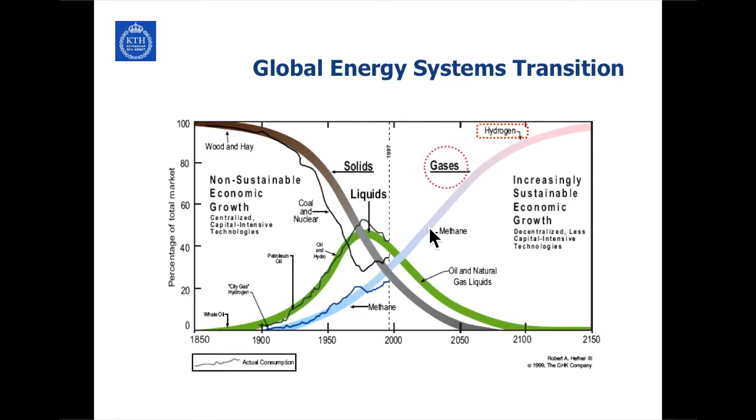So the thing we are trying to do is use natural gas right now for power generation to replace coal. So the usage of natural gas is going to go up. Eventually we are going to run out of natural gas, and it becomes about the use of methane, which also comes from natural gas. Eventually in this scenario we'll end up using hydrogen as the energy source.

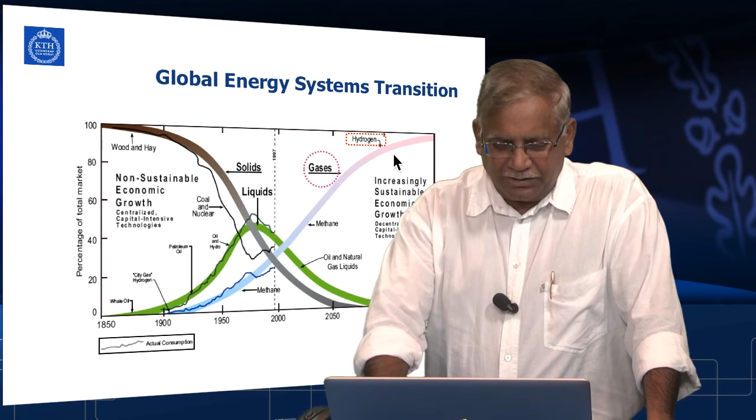So primarily this transition should take place around 2100-2150. This instance is primarily due to climate change and concern about sustainability and so on. So we can see the energy we are eventually getting into using hydrogen.

Now the question is, how do you produce hydrogen? Of course, we are interested in producing hydrogen using sustainable methods, and this is what's important - we want to have sustainable hydrogen. We produce a lot of hydrogen right now because hydrogen is used for cracking crude oil into gasoline and all that. So wherever there are refineries, we require a lot of hydrogen, and typically that hydrogen today is produced by cracking natural gas. So that is not what we like to do.

What we want to do is either use sustainable sources like biomass, or we use wind power, where the electricity is used to do electrolysis of water, or use solar power again to do electrolysis to produce hydrogen. There is one other way which is also non-polluting, but has other concerns - using nuclear power, which is quite cheap, but except we have other issues with nuclear power, like safety and what do we do with the spent fuel and all that stuff. So if you do that through nuclear power, we do it through catalysis.

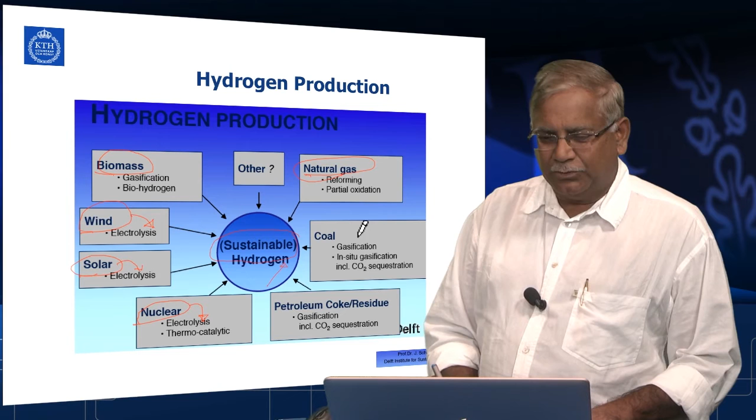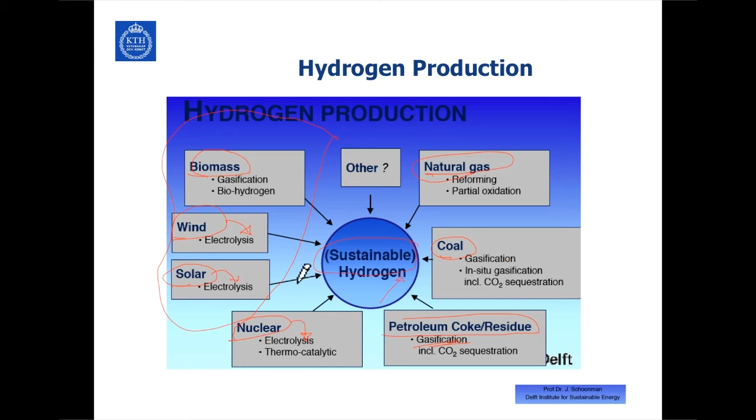Currently we are producing hydrogen by non-sustainable means using natural gas, which is how we produce most of the hydrogen today, and a little bit using coal, through gasification, or we use petroleum coke residues to gasify and produce hydrogen. But our intent is, in this context, when you produce hydrogen, we are producing using these three renewable sources: biomass, wind and solar.

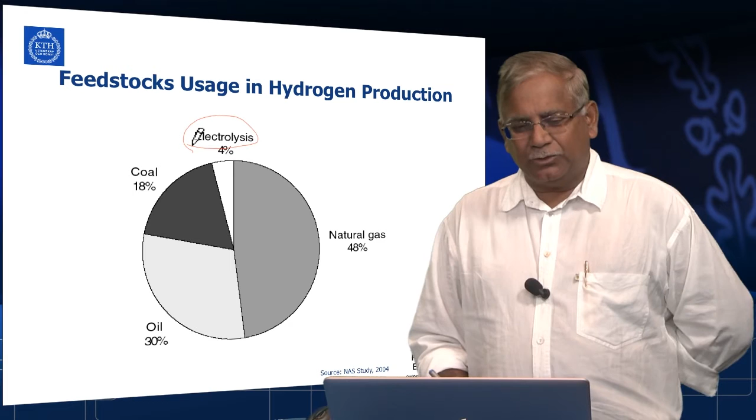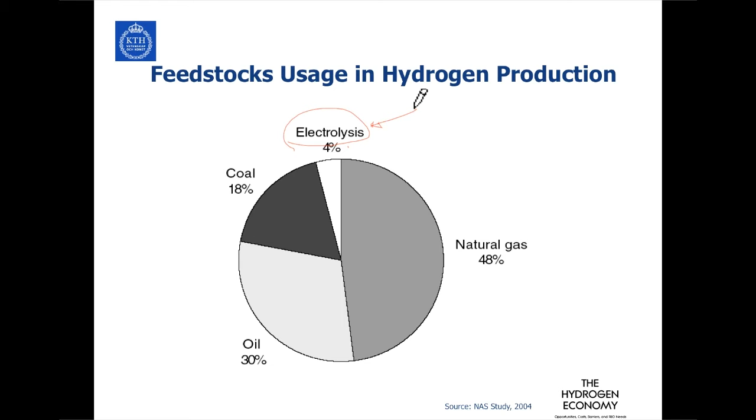Right now the feedstock usage in hydrogen production, as I said before, is mostly natural gas, and we also use oil to produce hydrogen, and somewhat coal. Electrolysis, which of course is the non-polluting way of producing hydrogen, is very little used because electrolysis costs quite a bit of money. That is the reason why we'll talk a little bit more about that. So most of the hydrogen now is being produced by using natural gas.

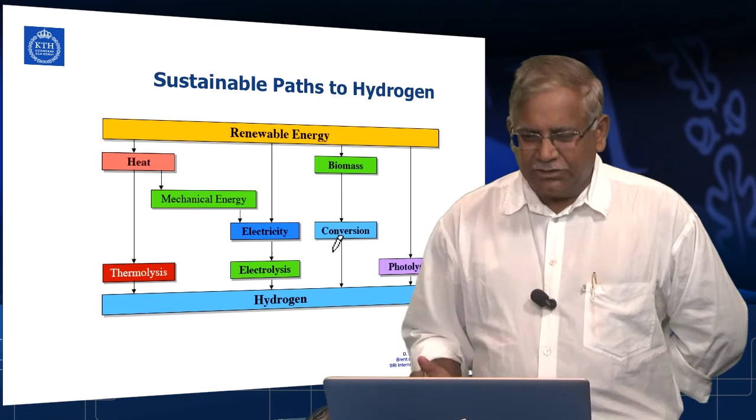And what is the sustainable way of producing hydrogen? You have renewable energy. One way is you produce heat, like for example concentrated solar power, or through gasification using biomass. From the heat you produce mechanical energy, and from mechanical energy produce electricity, and you use electrolysis to go into hydrogen. Or you can do what is called thermolysis, using very high temperature heat to break down water into hydrogen and oxygen.

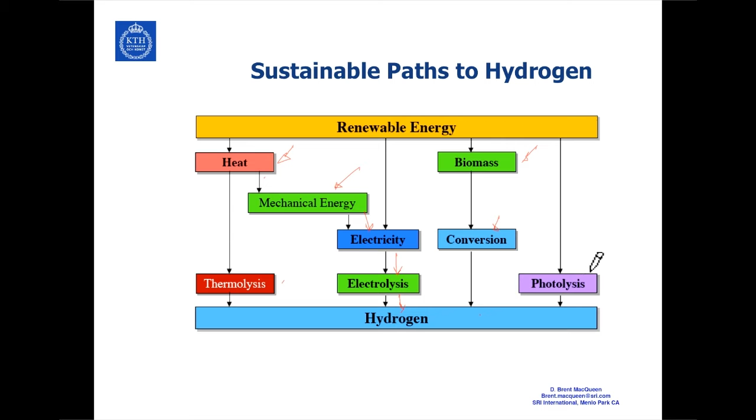Or, as I said, you can use biomass, and from that you produce CO and H2 by doing gasification, and from that you can do further reduction of the CO and produce hydrogen. Or you can do what is called photolysis, quite similar to a solar cell, but here you put the solar cell in water and do what is called photolysis. We'll briefly talk about that.

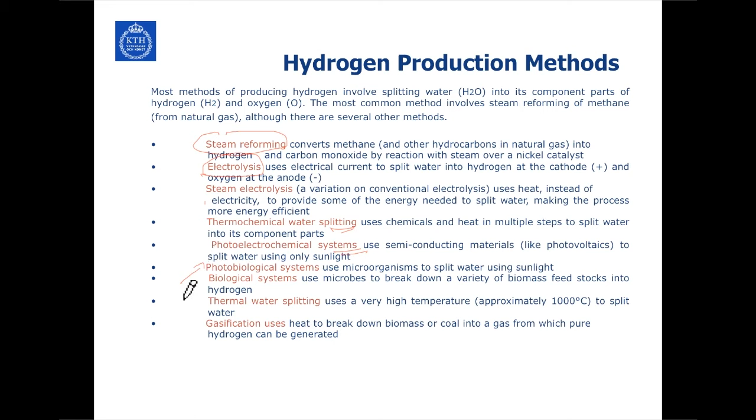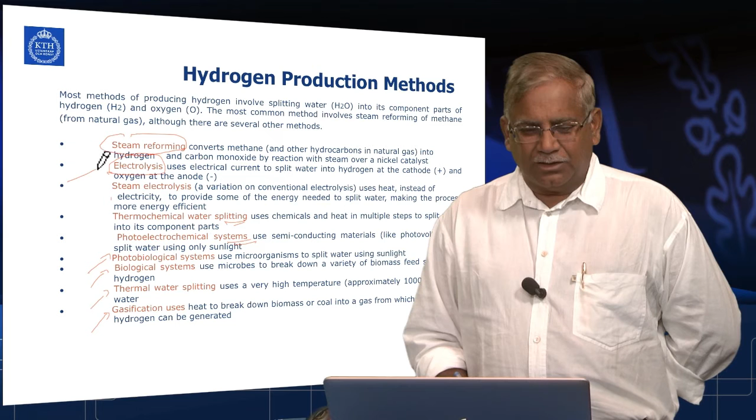So we talked about the different production methods. One is steam reforming, which converts the methane in natural gas, and electrolysis, which is splitting hydrogen and oxygen. You can do steam electrolysis as opposed to water electrolysis to minimize the energy used. Thermochemical water splitting is another one, and photoelectrochemical systems, photobiological systems, thermal water splitting, and gasification using heat. So these are the different production methods, and the most easiest one, which is very familiar, is electrolysis.

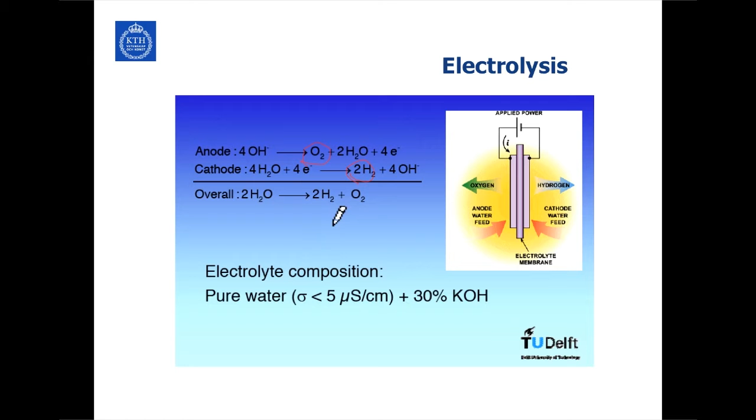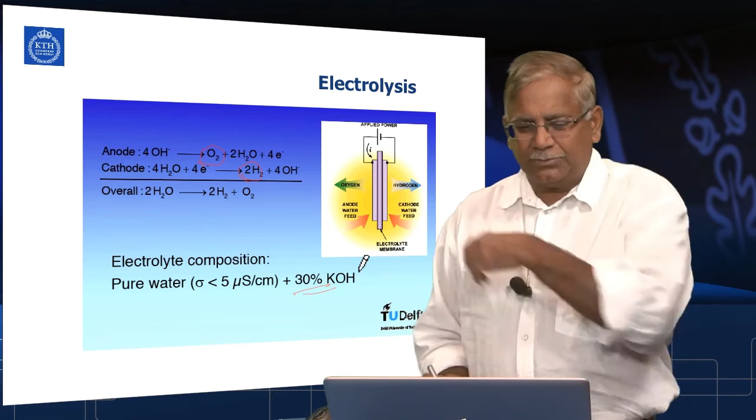In electrolysis, what you simply do is use water and split the hydrogen. In the electrolyzer, you put the water at the anode, then you apply voltage to the anode and the cathode. You split the oxygen and hydrogen from the water, and the hydrogen is the one we're interested in. Oxygen we can reuse for other purposes. Then you have to put some catalyst in the water, and we typically use potassium hydroxide, about a 30% solution.

The efficiency of electrolysis can be quite high depending on the theoretical efficiencies - you can reach about 85 to 90%. But for high purity hydrogen, you have to have high purity water. Typically when you want to do electrolysis, you take about 50 kilowatt hours of energy. So on average...

...kilowatt hour energy to produce 1 kilogram of hydrogen. Now 1 kilogram of hydrogen has about the same amount of energy as 1 gallon of gasoline, so you can think of it that way. If you take 50 kilowatt hours of electricity to produce hydrogen through electrolysis, electricity cost is typically about 15 cents per kilowatt hour in some places in the United States. So you're talking about $7.50 just for the electricity cost. But if electricity is very cheap, like from a nuclear power plant, about 3 to 4 cents, then electricity cost is only about $2, and you can produce hydrogen at an economical price.

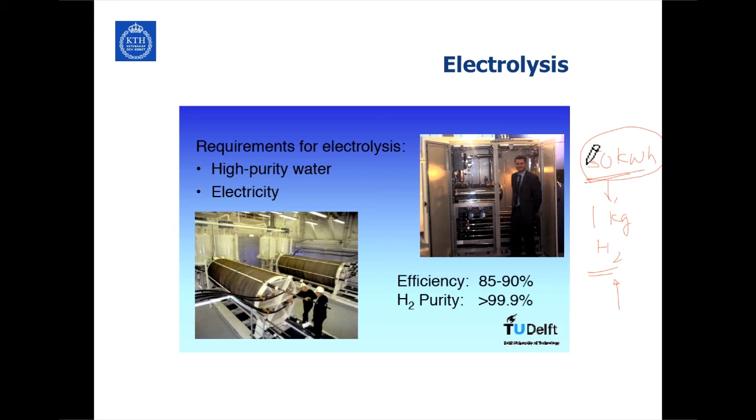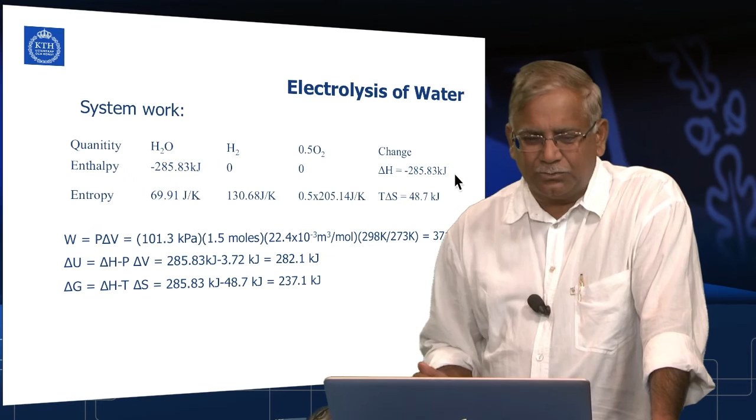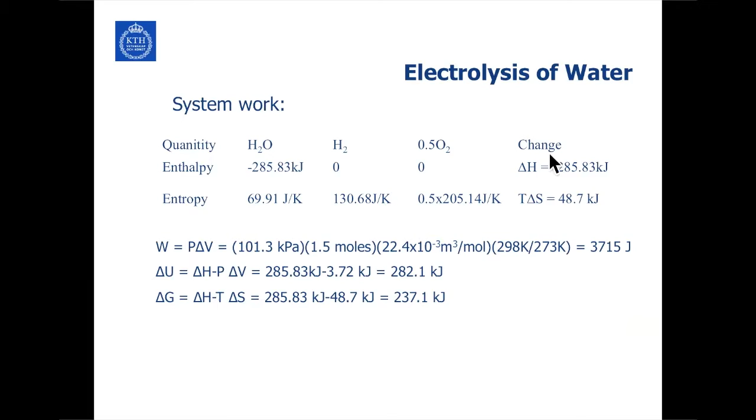So the question is, because electricity is the input and water isn't that expensive, most of the cost is in the electrolysis electricity cost. If you can find cheap electricity, this is the best way to do it. This is how the chemistry for electrolysis of water works, and how much energy is needed - you learned this in chemistry class before.

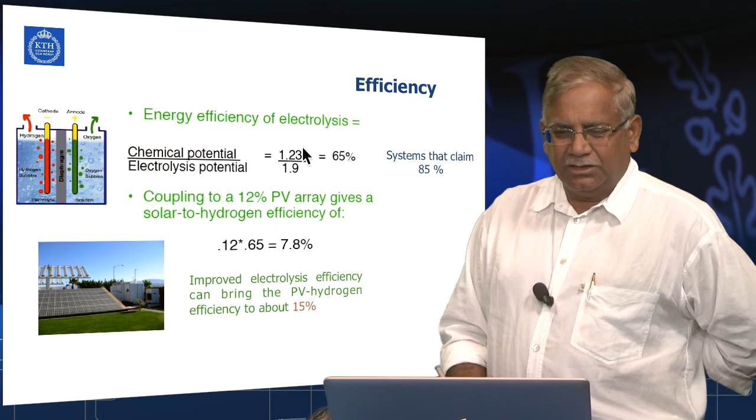Now we look at the efficiency of how it can be produced. The energy efficiency of electrolysis is about 65% for commercial units, but large scale systems have efficiencies close to 85%. The chemical potential is about 1.23 and electrolysis potential is about 1.9 - this is in terms of voltage. You can use less voltage in this case and get higher efficiency. So the idea is to reduce the electrolysis potential, done using different materials for the cathode and anode.

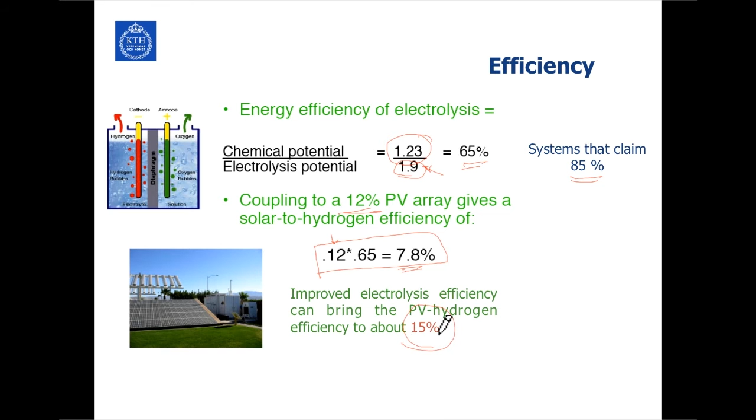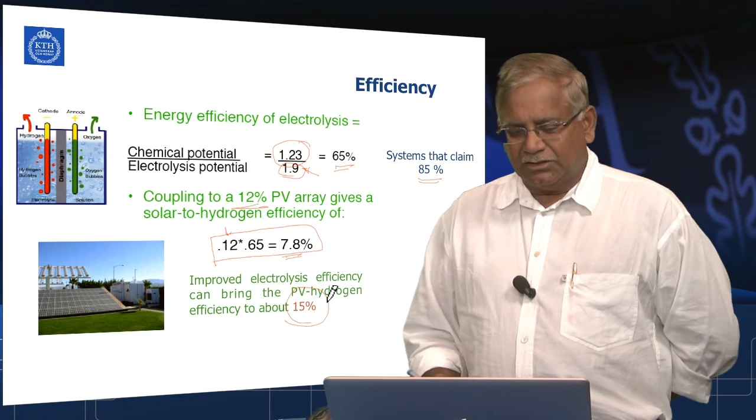Suppose you couple this with a PV system, and the PV system efficiency is, say, 12% - of course you can get much higher than that these days, but here the calculation assumes total efficiency of the PV array is about 12%. If you have 65% efficiency for a commercial unit, total conversion efficiency is about 7.8%. But if you can improve electrolysis efficiency to 85% and PV array efficiency to 15%, then total efficiency converting water using electricity into hydrogen is about 15%, which isn't too bad considering other systems.

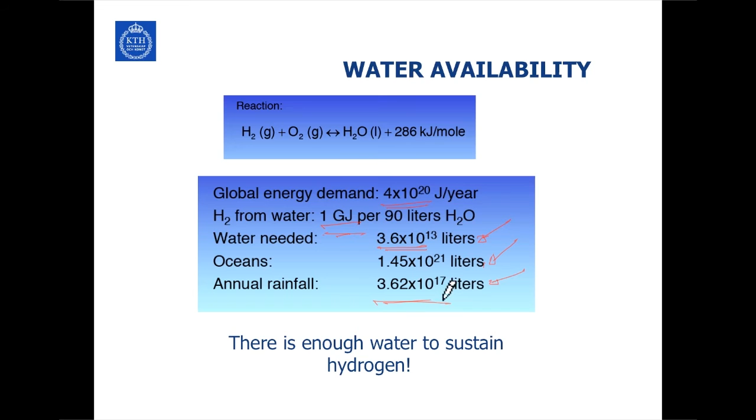Now the question one would ask is: is there sufficient water to sustain the world's hydrogen production? To answer that, global energy demand is about 4 times 10 to the power 20 joules per year. H2 from water gives you 1 gigajoule per 90 liters of H2O. So water needed is about 3.6 times 10 to the power 13 liters, and oceans have this much water, and annual rainfall is this much - plenty of water is in the oceans too.

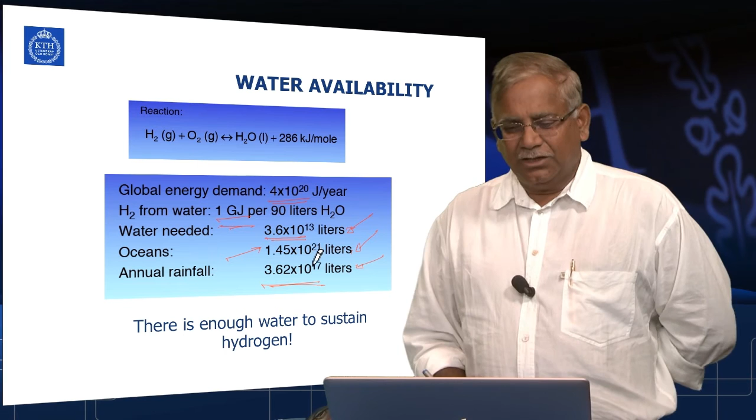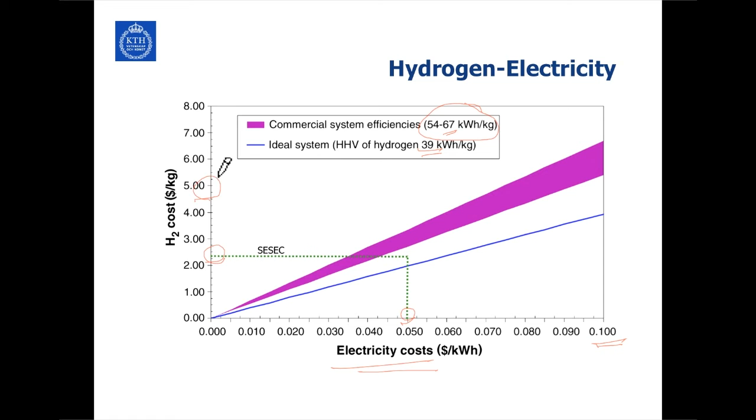If there is a nuclear power plant that produces power at 5 cents a kilowatt hour, then you can get to about $2.50 a kilogram for hydrogen. In Sweden, for example, gasoline costs about almost $5 a gallon. So if you can produce hydrogen at $5 a kilogram, equivalent to the same amount of energy as 1 gallon of gasoline, then we are okay. But there are other benefits by using hydrogen in terms of the emissions generated.

So if you can produce hydrogen for about $5 a kilogram, that is quite good in terms of regular usage, both in automobiles and storage and other applications.

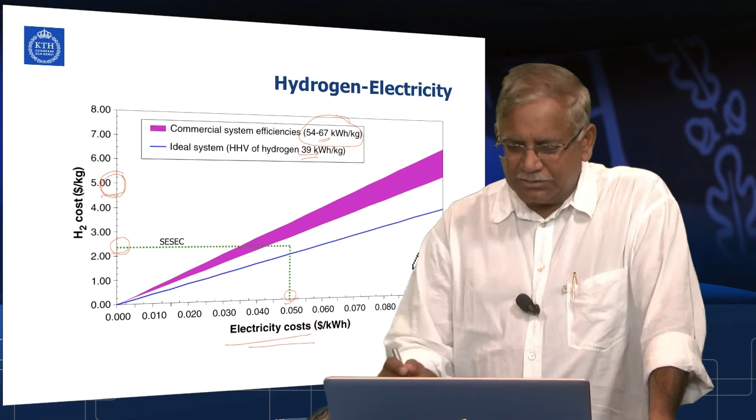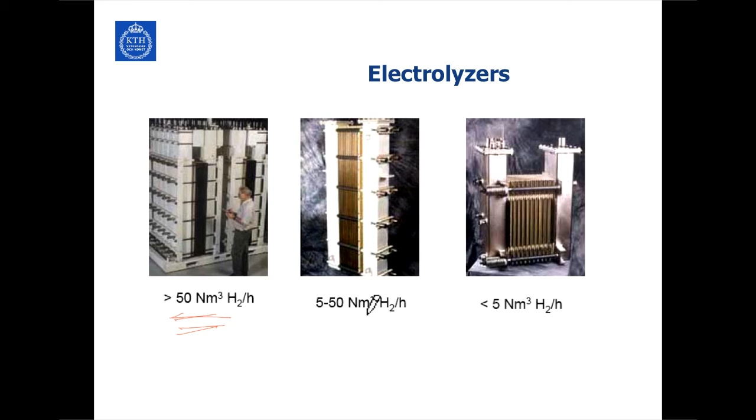This plot essentially gives you some idea of what it costs to generate hydrogen. These are some of the electrolyzers, and these are nominal meter cubes they produce per hour. These are large electrolysis machines, mostly made by a company in Norway. For example, this one produces about 50 nominal meter cube of hydrogen per hour, meaning at standard room temperature and room pressure. So that's quite a large production of hydrogen, and there are other units, much smaller units.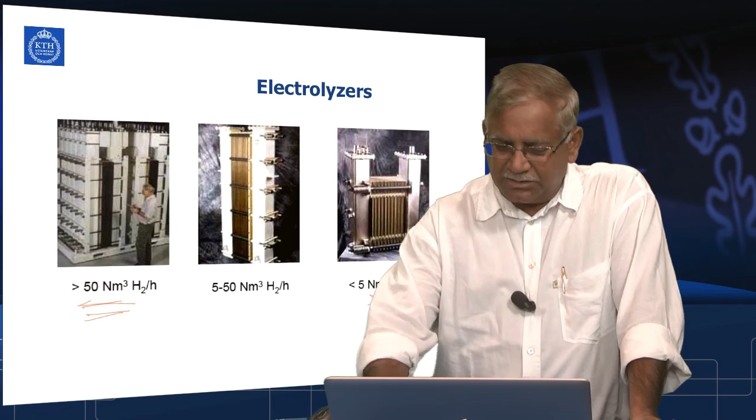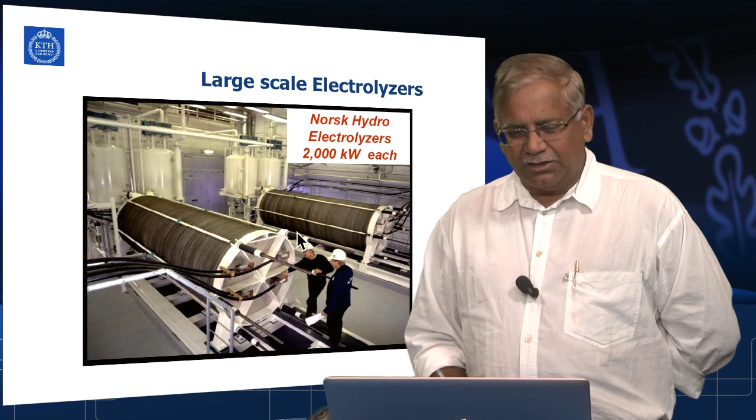At 5 meter cube per hour, there are units, except the cost is another thing which you have to keep in mind. And this electrolyzer will take about 2000 kilowatts of power to produce this. So these are very, very large scale hydrogen producing units using electrolysis.

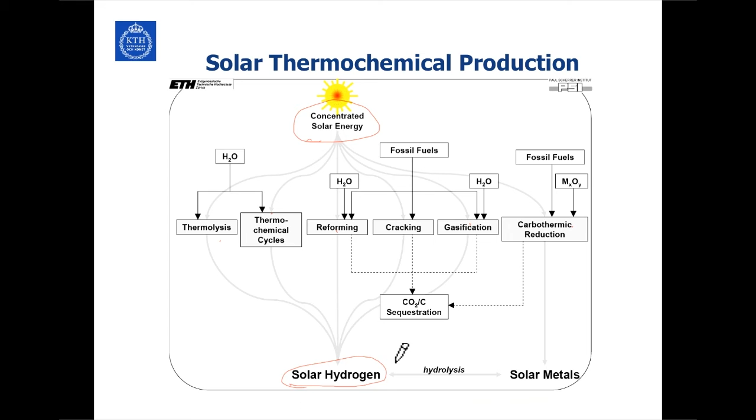Another way to produce hydrogen is what is called solar thermochemical production. So you have concentrated solar energy, then you can do what is called thermolysis or thermochemical cycles, or you can do reforming, cracking, or gasification, and carbothermic reduction. Using concentrated solar energy to produce hydrogen is called solar hydrogen, and that I think is ultimately the way to go.

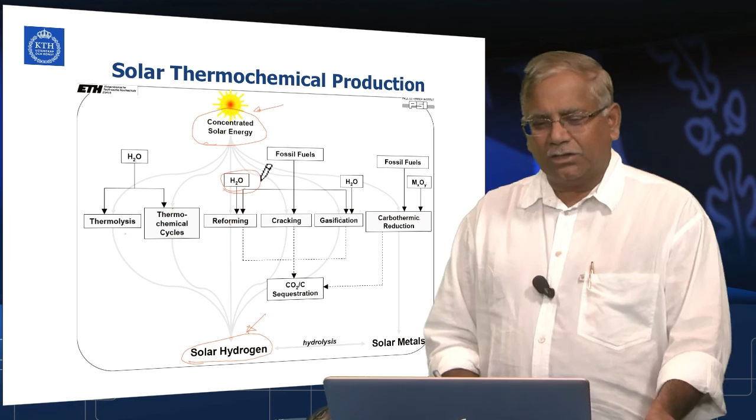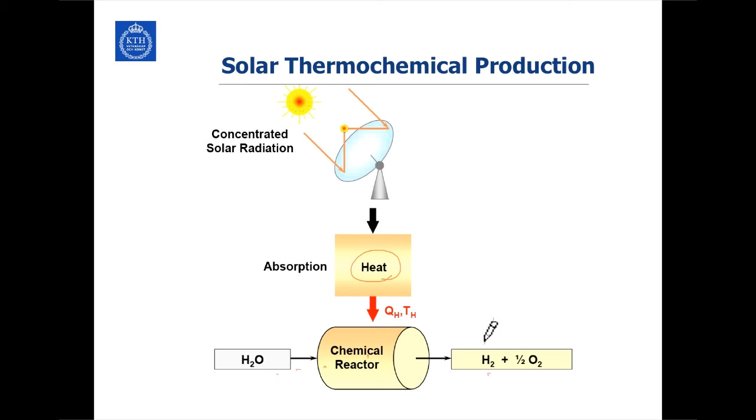One way to do that is CSP can be very useful. In this particular case, you generate very high temperatures and then crack the water into hydrogen and oxygen, and of course that requires very high temperatures. The way to do this is using concentrated solar radiation to generate heat, quite a large temperature heat. Then you send that heat into a chemical reactor along with water, and you split it into hydrogen and oxygen. This is called solar thermochemical production, and I think this makes a lot of sense when you have very high insolation solar radiation.

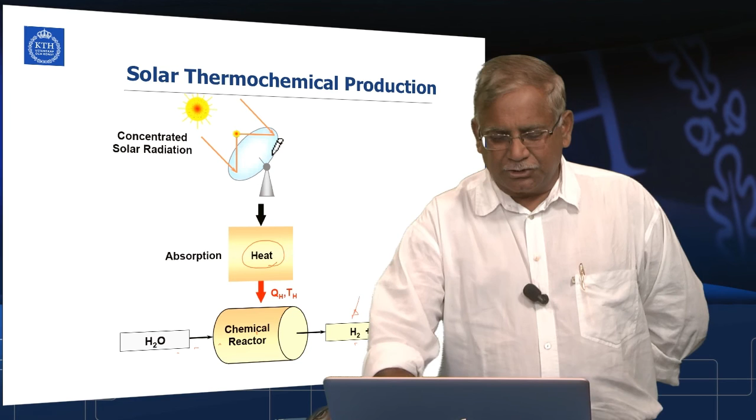Another way to produce hydrogen is through biomass. In fact, this is stuff we have done. What you do is called steam gasification. You send the biomass into the gasifier, and you also send the steam, and then at very high temperature, the gas which comes out is called synthesis gas, which is CO plus H2.

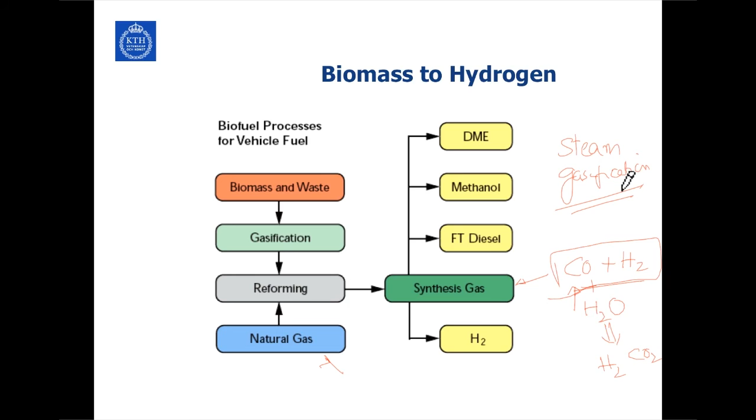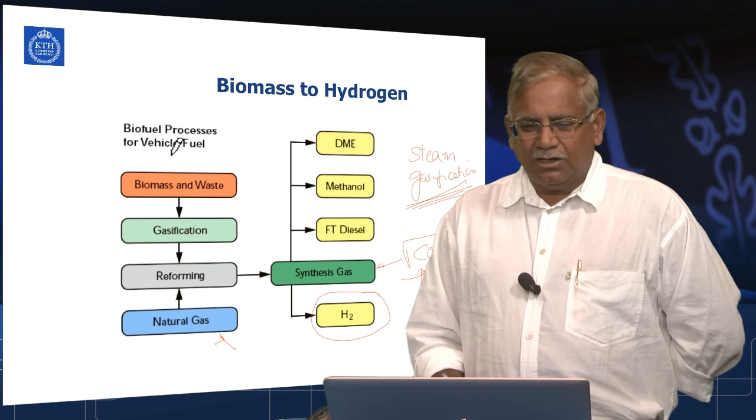Now what you do is take the CO and react it with H2O again, then these two, CO and H2O, produce additional hydrogen and CO2. So essentially you can produce a lot of hydrogen using steam gasification. There are other ways of doing it also. Take this synthesis gas, either you produce hydrogen or you can produce diesel, methanol and DME fuels. But here our interest is to produce hydrogen, and this is one way to do this. It's actually not difficult, and one of my students built a reactor, a biomass gasifier using steam and biomass.

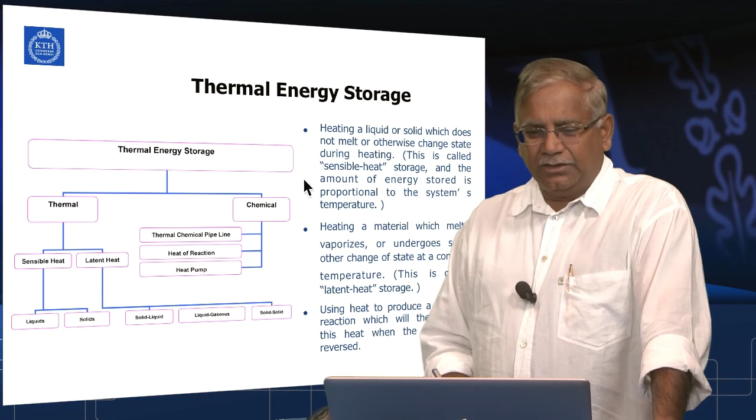Another last one we're going to talk about in storage is thermal energy storage, and here what you do is use chemicals and look at the phase change. We heat a liquid or solid which does not melt or otherwise change state during the heating. For example, if you take salt which can be heated, when you heat up the salt it becomes a liquid, and when you take the heat out it becomes solid. We use that phase change process as a means of storing energy.

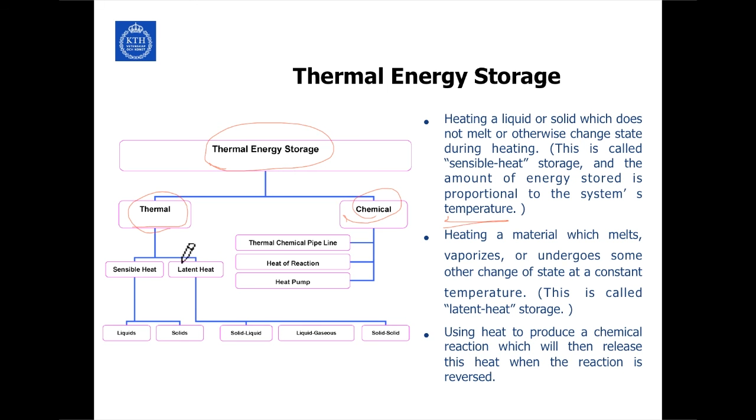It depends upon the storage temperature we are trying to use, and in fact when you learn the CSP part of this course, hopefully they have talked about thermal energy storage and various ways of doing this. One way is through chemical or thermal storing of the temperature, or you can do the thermochemical way of storing the energy. These are different paths you can take, and most often what is used today is molten salt.

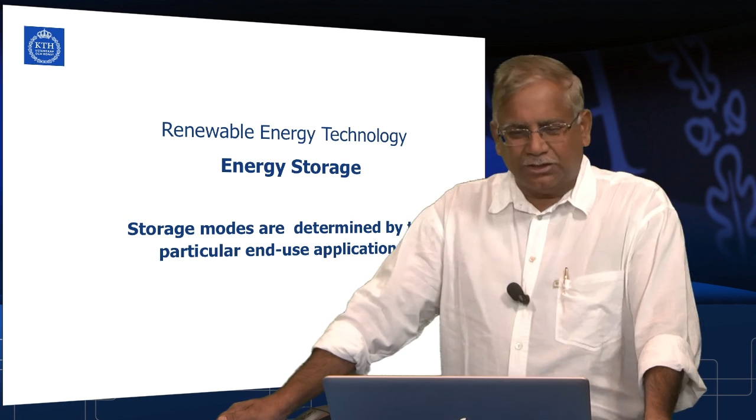So I hope that although these are only an introduction to the subject, hopefully you have learned something about photovoltaics and the storage of energy, which are both essential for renewable energy technology. Thank you.